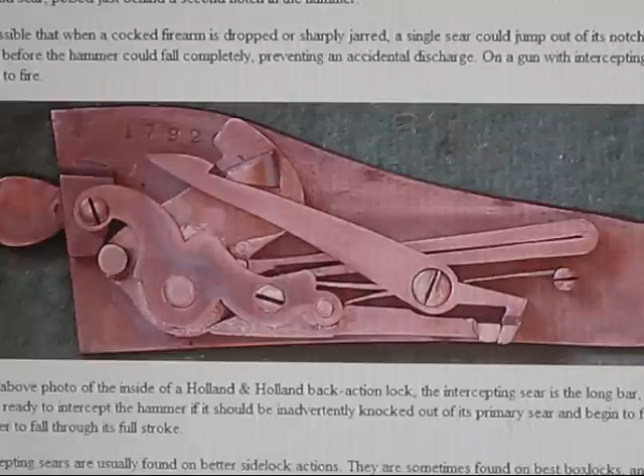So I'm going to start into the locks this week, and what I wanted to show you was the type of safeties I'm going to incorporate into this lock. And basically, this is a picture off of Hallowell & Company's glossaries and definitions page, and this is a picture of a side lock with an intercepting sear. This is the regular sear down here where it engages the tumbler, and then up here this is an intercepting sear that intercepts, hence the name, the part of the hammer on an internal hammer like this.

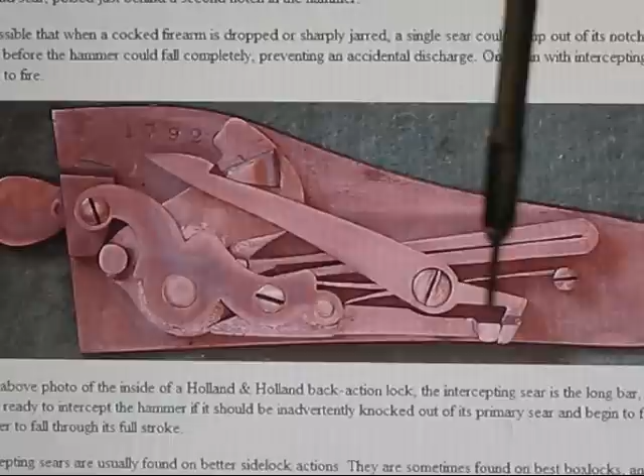What I'm going to do is take this basic design and modify the L&R locks to use this intercepting sear idea. And then there's another feature I'm going to put on the L&R lock, and you can see this has a nice dolphin shape to it, this lock here. But it has something else that's a real nice safety feature.

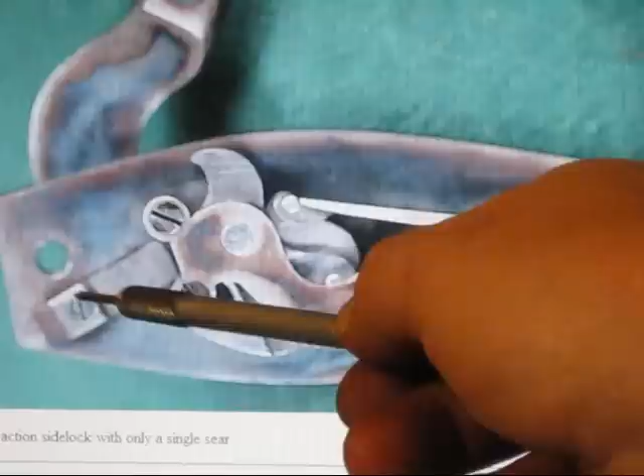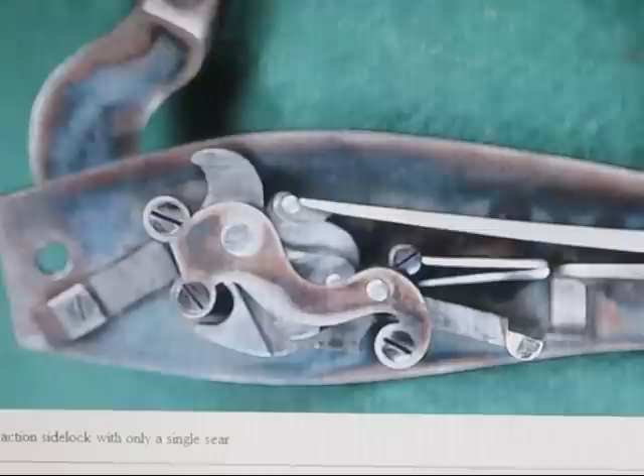This piece on the inside here, as you see it, is called a stalking safety. On the outside it's got a little flat or knob that allows you to push it in or out, and it actually engages the hammer itself on the outside. There'll be a notch in the bottom side of the hammer in between the plate and the hammer itself, and this safety will physically engage the hammer and keep it from rotating. So this is a back action lock similar to what I'm going to use, but it doesn't have the intercepting sear. It has a single sear.

So what I'm going to do is incorporate a stalking safety into it and the intercepting sear to intercept the tumbler. I'm going to show you how that's done, and I'll do a little drawing to show you how it looks on paper with the type of modifications I'm going to make, and then I'll get started on building them.

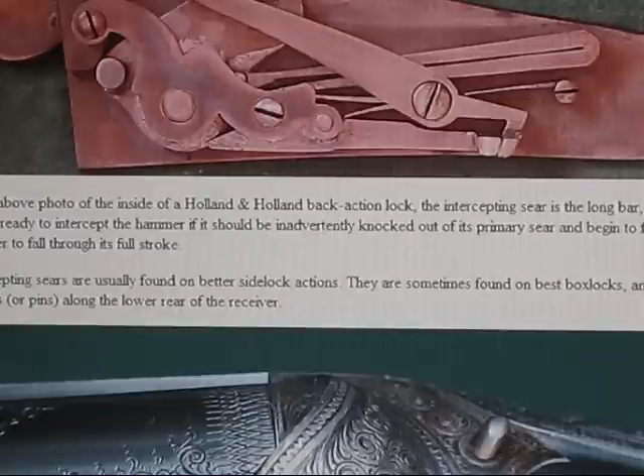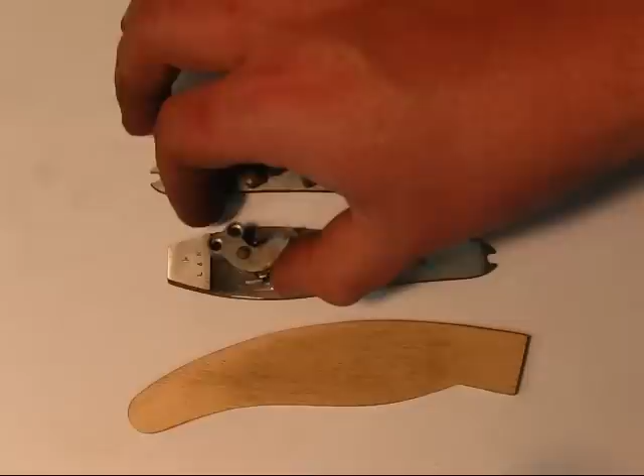So what I've got here is the left-hand lock, which is still mostly fully assembled. And then I've got the right-hand lock, which is almost completely taken apart. All that's left on here is the tumbler and the bridle right at the minute. And then I've got the lock template that I'm going to use to reshape these. I want to show you the template first, how I'm going to change the body style of these straight locks to a nice dolphin shape.

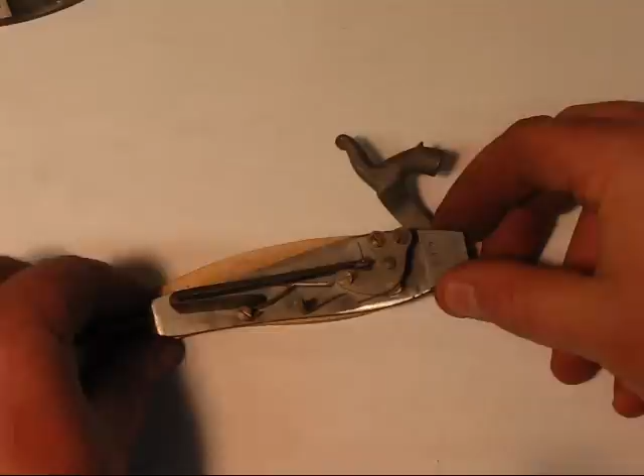The way that's going to work is, I've used this template for a lot of other guns, and it's got a long tab up here on front which allows me to shape it any way I want to tie into the action, and it's a little longer in the body section here, which allows it to flow better into the pistol grip section. And then the rest of it just fits so that it will cover all the internals of a standard L&R lock.

So basically I get to use all the internals of a regular L&R lock, and I'm just going to replace the lock plate on the outside to give it that nice dolphin shape and get the right contour to match the grip and tie into the action. So now I'm going to talk to you about how I'm going to modify the safeties to give it an intercepting sear and a stocking safety.

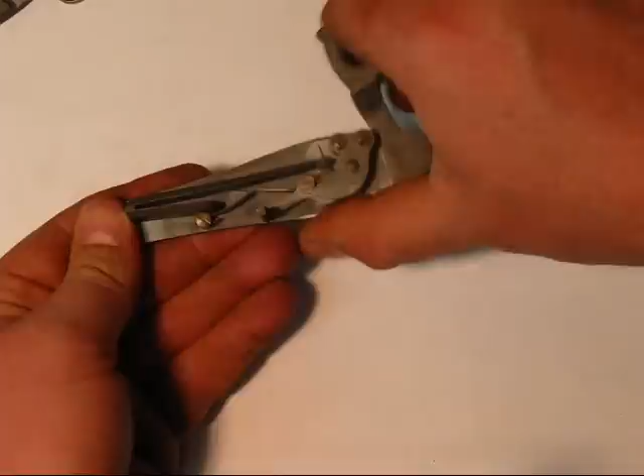On a standard L&R lock, they only have one safety built into them, and that's a half-cock notch right there. You can't pull the sear through that notch unless you're really trying. It is possible to break through a half-cock notch on just about any style lock that has a half-cock, but for the most part you can't really push the sear through it. And then it goes to a full-cock position. So that's the only safety on a standard L&R lock, and on most muzzle loaders. The traditional safety is a half-cock notch, and that's all you get.

But since this is a cartridge gun and it's a double rifle, and this one happens to be extremely big and going to have considerable recoil, I want to build some other safety features into it, like the intercepting sear I talked about and the stocking safety. To do the intercepting sear, I'm going to machine a hole that runs right along where the tumbler sticks through the bridle here.

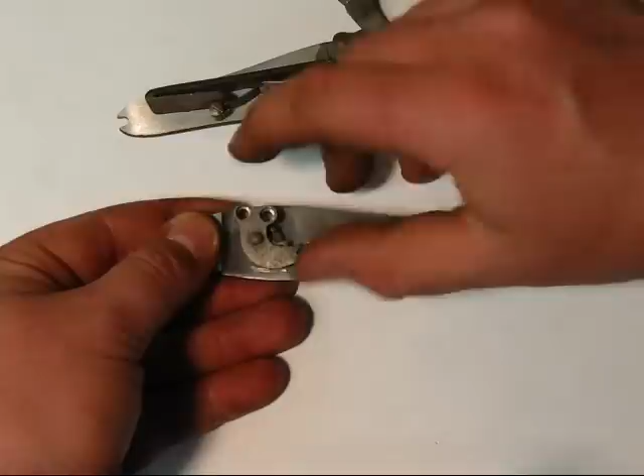And then there'll be an intercepting sear that runs up here and catches the front edge of that bar sticking out. So that in the event of recoil dislodging the first sear, that bar will engage and catch the tumbler itself and prevent it from rolling down with recoil. The only way to make it actually clear and fire would be to have it on full cock and to be able to actually work both sears up at the same time.

There'll be a leg that comes off the tumbler and penetrates right through the bridle, and there'll be an intercepting sear that intercepts that leg and prevents it from rotating forward.

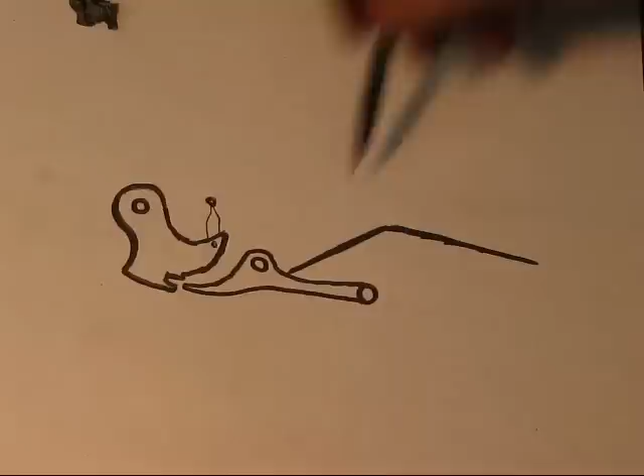So here's an exaggerated drawing of the tumbler and the sear spring. The main spring would be hooked up to this stirrup here. And so basically, same piece right here. Got the tumbler shaft, half cock, full cock, and the stirrup. And that's what I've got drawn here, half cock, full cock, and the stirrup.

So what I'm going to do to make an intercepting sear out of this is I'm going to add a piece of material up here to the top of the tumbler. And if you were looking at this from the top down, what you would see is a piece like this that had the axle sticking out of it, and then it'd come back to this, and you'd have your stirrup piece sticking through here and up.

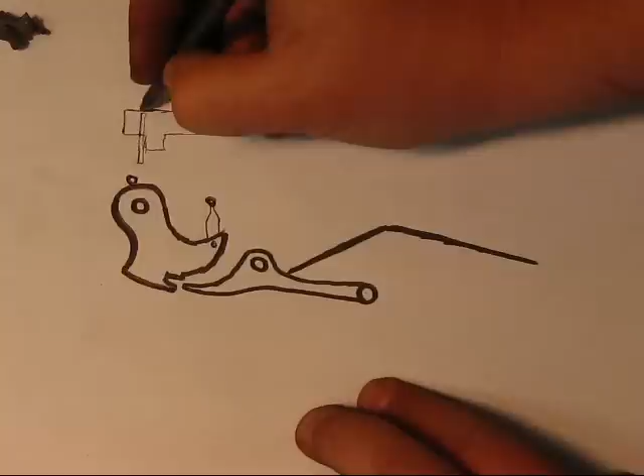Like so. And so what I'm going to do is I'm going to add a piece to this that sticks out through the bridle like so. And that'll give me a piece sticking out the top of it here, so that when I add the... and of course this isn't drawn exactly dimensionally how this is going to be, it's just to give you an idea of the second armature of the intercepting sear.

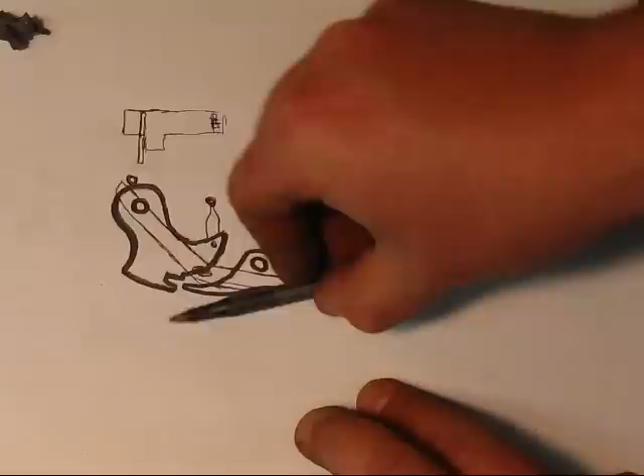And so there'll be an intercepting sear piece that'll lay basically on the outside of the sear, and it'll be hinged in here somewhere. And so what'll happen is when the sear releases, the intercepting sear will drop down out of the way and allow this to rotate. But if only the sear releases and not the intercepting sear, it'll catch and prevent the tumbler from rotating.

So basically, if your trigger piece were down here, and you pull the trigger, it moves both pieces, clearance happens, the sear disengages from the full cock notch, allowing the tumbler to rotate. But if recoil, or bouncing it or jostling it or dropping it, knocks the sear loose from the full cock notch, the intercepting sear is still engaged and prevents the tumbler from rotating. So that's going to be the intercepting sear.

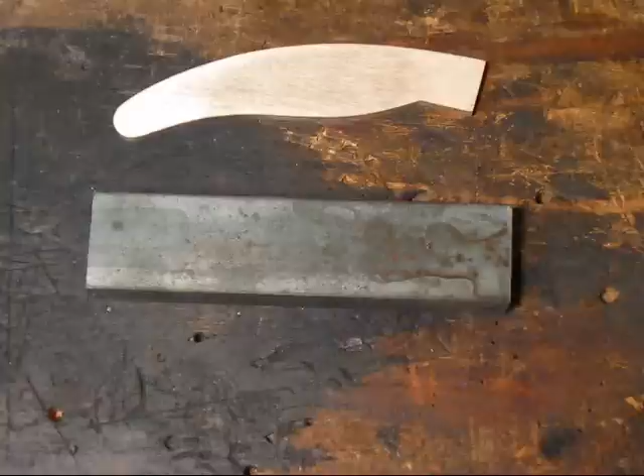Since I'm going to be making several of these locks, two for the double rifle, and then I've got a pistol build that's going to need a lock this shape as well, what I've done is I've cut three pieces of just plain old 1018, and the reason I'm not using 8620 or anything on this is 1018 will still color case beautifully to match the rest of the action.

But this lock plate isn't critical. It's not a critical part that's going to take a lot of stress or anything else. It just contains the parts that function to make the lock work. So it doesn't have to be out of 8620 or anything special. It can be out of just plain old 1018, and it'll color case up and match really well, so that's not going to be a problem.

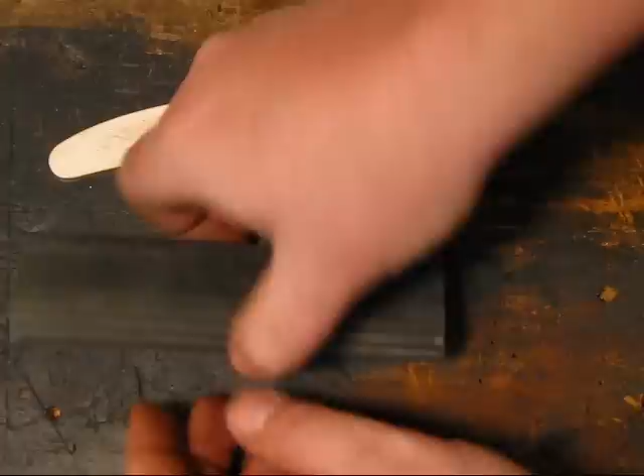So what I've done is, since I've got to make three of these, and they all need to look the same and match, is I cut three pieces of plate, and then I took my TIG and just washed over it and tied the ends together.

I didn't even use any filler rod to do this. I just washed them in and tied them together at both ends, and that keeps everything held together nicely in alignment. And then what I'll do is I will put my template on here, I will scribe around it, and then I'll probably come in and punch it so that I don't lose my scribe lines while I'm removing material. And then I'll come in and I'll just cut it out basically.

And then as long as I don't cut clean through the face and the back, if I leave the radius and the face here till the very last thing when I'm ready to separate them, I can go ahead and do some of my drilling operations while it's still all stacked together, so I know that everything will be the same from each lock. So that's how we're going to start this, scribing some lines on here and then cutting it out, and then I'll start drilling my holes where they belong.

So the first step was to hack off the bulk of this extra metal up here, and then I used my 12-inch disc grinder to shape the curved contour, and it works pretty good that way if you can get it down close to the line and then just use a big grinder to take it off. If not, it can always be done with files or hand grinders or any number of other ways. I just happen to have a big 12-inch grinder that removes metal pretty fast. But the stack's still welded together at both ends, so that's holding it nicely in shape.

Now what I'll do is I'll come in and I'll saw these parts off as close as I can get them without getting too accurate, and then I'll use an oscillating sander to take in the internal curve and probably do a little of the external curve with it, the concave and the convex part, and then up here I'll probably finish this out with file work.

You'll notice when I laid this out, I used a piece of metal that was fairly close to the overall size that I was going to need, so I didn't have a ton of stuff to remove. And you'll also notice that I made the parts that are going to be the most difficult to work basically as shallow as I could make them. That way it'll save me time in removing material.

I'll leave this section back here until last, along with this section up here. So basically the ends will be done last after I do some drill work and stuff. But I'll be able to take off all of this section here, doing some saw work, and then using the oscillating spindle sander, and then there's a little bit of hand work to clean up the last of it. So pretty straightforward. I'll show you what it looks like once I get some of this other stuff removed.

So now I have everything pretty closely shaped, and all that's left is just the ends that are still holding the stack together, and it follows the template pretty closely. Just what I wanted. So the next step is to do some layout work, and what you'll notice here is I can basically use the lock to get everything fairly close. The original lock plate will give me all of my holes, and I can use edge finders to actually locate edges and then move to center on each one of these.

So that's the easy way to do it: use the lock plate, do some layouts, then take some measurements to ensure that you find actual true center, and then clamp it in the mill drill and drill some holes through it. On this one particularly, all of these are threaded holes, but this one here for the tumbler, I'll actually drill it undersized, and then I have a reamer that's the right diameter, and I'll ream that hole through as a final cut. So that's how that'll be done, and I'll show you how it looks after the holes are put in it.

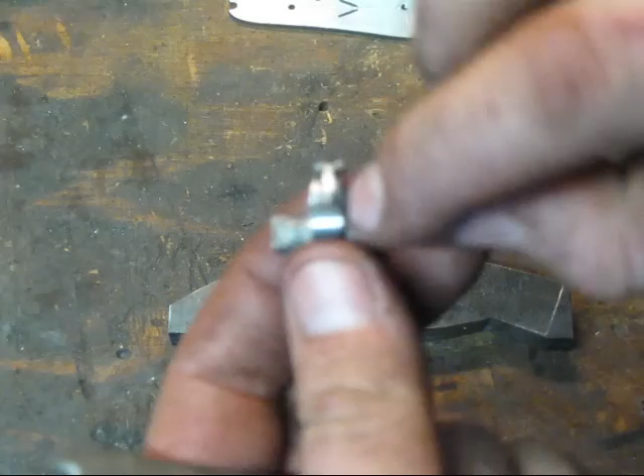So I drilled all the holes here, reamed the tumbler shaft hole, and wanted to show you this. In a standard L&R lock, the way they come, I don't know if you'll be able to see this really well or not, but I'll try and get it in here. What you'll notice is that this surface here is nice and shiny and ground, and there's a couple other surfaces that are ground and polished, but overall most of these parts on an L&R lock are as cast, basically.

So none of the shoulders are polished, none of the shafts are polished, the tumbler shaft isn't polished, and you'll notice that when I stick it in here, it's really kind of a low tolerance fit. It's got a little slop and play in it, and it doesn't really snug in and rotate really smoothly. It's hard to get this thing to focus on that without going to a macro setting. But anyways, you get the idea that there's a bit of slop in these from L&R's manufacturing.

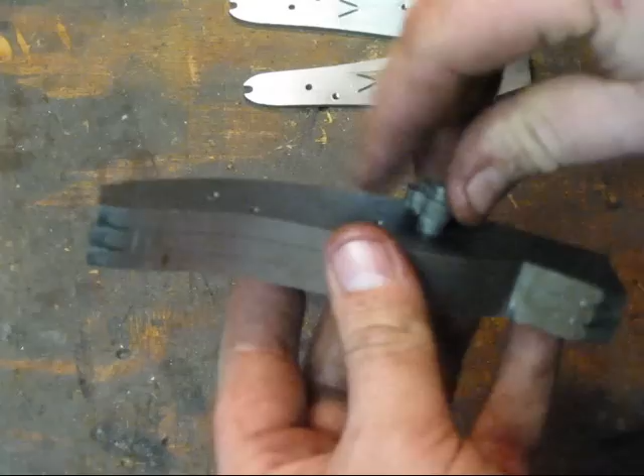And so when I reamed this, I reamed it just a few thousandths undersized. You'll notice that this one won't quite seat down in there like it does on that other lock. What I'm going to do is take some lapping compound, smear some on this, and hand lap this until it's a precision fit in there, where it has just enough slack in it to rotate really smoothly. That way it's got the full amount of shoulder on it, full amount of bearing surface, the most precision fit I can make it.

And when I harden this lock plate up and color case it, it ought to rotate like greased glass in there. But right now it's a little tight, a little snug, and I will hand lap that in to make it a real precision fit. These other holes are tapped, except for this one, which is the mainspring hole, and this mainspring hole is drilled for a precision fit too. So, anyways, just wanted to show you that so you can see the difference between a lock that works and functions good and a lock that's truly a precision fit, a hand-fitted, craftsman-made lock.

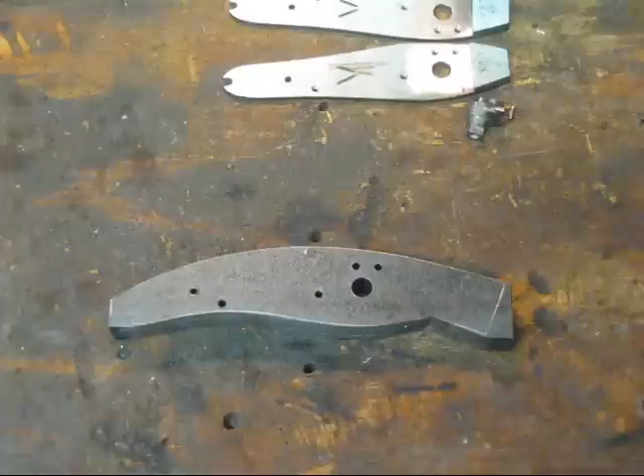So, I guess I'll go on a little rant here for just a second. Some of the lock companies are really, really good about the fits of the parts in their locks. Chambers' flintlocks are some of the finest I've ever seen made. Their fits and tolerances are very good. They work like greased glass. They're a very fast lock. R.E. Davis is another good one. Their locks are pretty well made. And L&R is probably the third major company in this country, and a lot of their tolerances on L&R stuff were a little loose, actually.

And so, just from my point of view, if I can buy a Chambers in the same style and period and time frame as I would an L&R, I'll take the Chambers every time, because it saves me a lot of work when I'm actually building the stuff and making the lock. In this case, though, nobody makes this style of lock plate in this type of lock with the safety features I'm going to put in it, so it didn't really matter. I had to make it anyways.

Buying L&R parts just saves me the time of having to machine and manufacture each individual part, plus make the springs. I'm able to strip their parts out, polish them up, clean them up real good, bring them into real tight tolerances, and turn their parts into a real good high-end lock. So for me, it's just a time saver to gut one of their locks and redo it. But anytime I can buy a lock that's really high quality and precision made, like Chambers or Davis, I'll take the Chambers every time.

So none of these holes are tapped yet, and the reason I didn't tap them yet is because there's no point in trying to run a tap down through this big thick block and running a risk of it getting jammed in between the layers or anything and breaking a tap off.

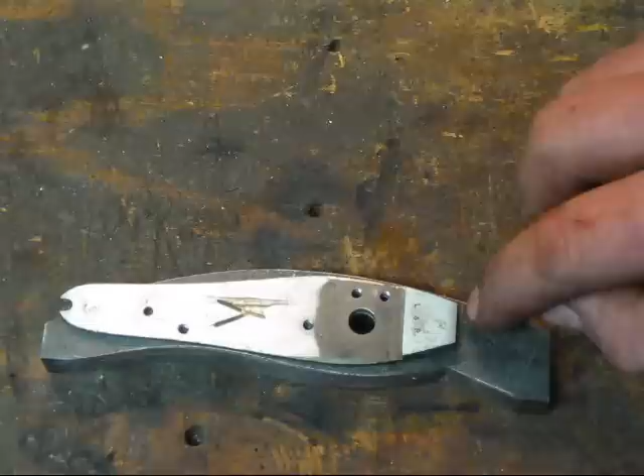And then the next step, what I'm going to do next on this is go ahead and separate these. I'm going to finish rounding out this end, which will take that weld off of there. And then I'm going to lay it out for length where I want my piece to end up here in front. I need a little more length than what I have here because of the way it's going to fit into the corner of the action, and so I'll leave a little extra on here and I'll go ahead and cut it off, and that'll take care of the welds I made on this end, and I'll have 3 separate locks that I'll be able to lay down flat and start machining them down to proper thickness.

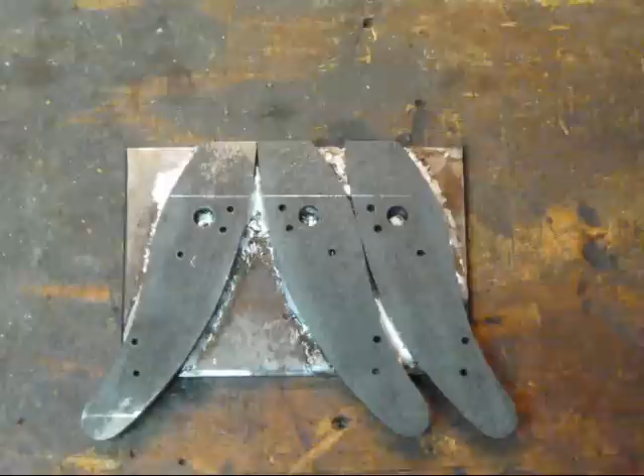So as you can see, ready to start machining these down to thickness, and what I've done is I've laid these out. It's 2 lefts and a right, so I'm going to machine the inside material out. And what I did was, because as this gets cut and it gets thinner, it's going to tend to warp. So to prevent it from doing that, I did a really quick and ugly solder job and soldered it down to a pretty thick piece of plate steel here. And that'll hold it down nice and tight, so that when it's cutting back and forth and it starts to get thinner, it doesn't warp up away from there and cause an uneven cut, hopefully.

You can see I just laid a scribe line on there. That's roughly where I'm going to cut to. When I get close, I'll measure it on the mill and actually bring it down to where it needs to be, but that's close enough. And then there's a scribe line back here, and this is one of the changes I'm going to make, and I do this on a lot of these kind of locks, is I leave this back thick just like the front is.

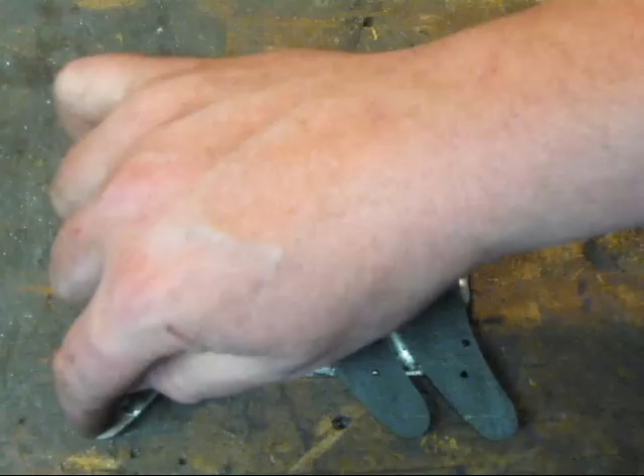And the reason I do that is instead of putting a wood screw in, which is what this lock's designed for, what I'll actually do is drill through and through from the left lock to the right lock, or vice versa, and I'll tap one side and countersink the other, and then there'll be one screw that pulls in and sandwiches the tail of both locks into the wood. So that extra bit of material there gives me room to countersink, and it gives me room to get some extra threads in there. So that's why I leave that end piece on there.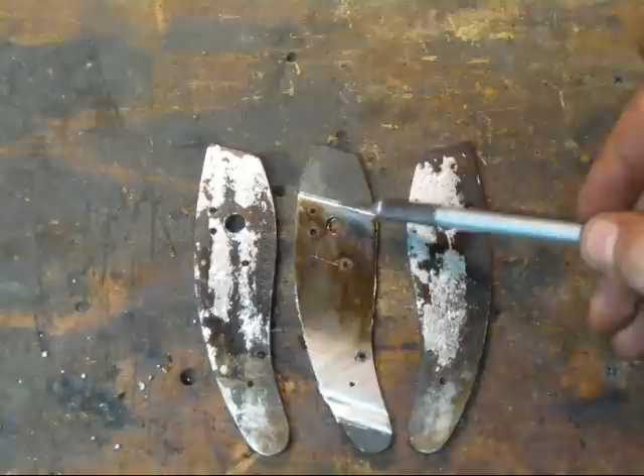So you can see that I got them machined down. All three of them have the same inset in them, and they're the right thickness now to work with the parts that I've got. And you can see that I've unsoldered them from the plate that I had them attached to for the machining. Now what I'm going to do is clean up all this solder on the inside and outside and all these edges. I'll clean up any machining edges that are left rough. I'll clean out all the holes, and then I'll go ahead and tap these holes.

I'll lap the tumbler hole and get the tumblers fitting real good, and then I'm going to reassemble everything on these locks and make sure that everything functions as a normal lock before I start making modifications for safety and whatnot.

The reason I'm going to do it that way is because if anything's off or anything's wrong, depending on how bad it is, I may be able to just fix it, or if anything is badly off, then I'll just scrap these and make a new set of plates and redo everything. But it'll save me time instead of going through all the effort of making the safeties and getting it all built and then putting it together and it doesn't fit. So I'll go ahead and clean these up after they cool and reassemble them, and then I'll see if everything works properly. If it all does, then I'll move on to the next step of making the safeties for them.

So here's the first of the three locks put back together. This is the one I'm going to use for that extra project, and you can see it really enhanced the shape of the lock plate, gave it a nice smooth curve, and so it'll match a nice pistol grip radius that way and really blend in better in the stock and have an overall better appearance.

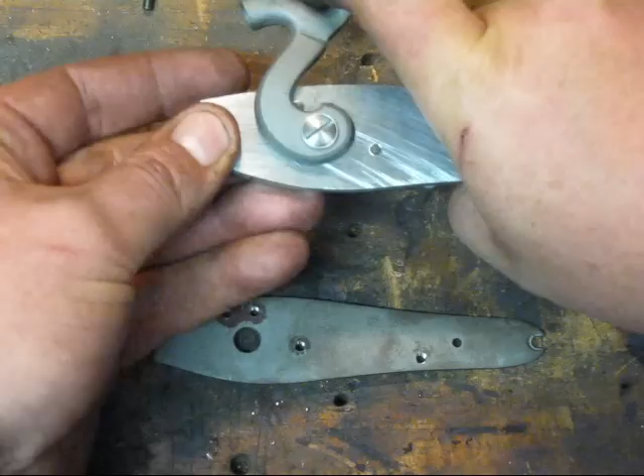This one is basically done. I won't have to add the safeties or anything to this because this is not going on a double rifle project. It's actually going on a pistol, and so it'll be a real simple setup that's basically finished the way it is. I just need to polish out the rest of these parts and polish out the hammer, and it's basically done. But it functions just like it should, from half cock to full cock and then to release. So that's the way that one's going to look.

One of the reasons I put this one together before I messed with the other two is because I wanted to look at clearances and stuff, and I was kind of concerned about this when I was first setting it up and thinking about where I'm going to put the stocking safety. And as I mentioned earlier, I had wanted to put the stocking safety in front of it here, but you'll notice that in the full hammer down position, in the fired position, there's not very much room up here. And so on the double rifle, where the breeches will stick out past it, I don't think a guy's going to be able to get his hand in there and work it really smooth and cleanly. It'll be kind of a cramped space.

So what I'm going to do is, on the other two locks, I'm going to put the stocking safety behind the hammer, and then it'll have plenty of room back here. A guy will be able to get his hand in and snap it forward or back and make it work properly. So a little change of plan, but nothing that really changes anything overall. It just means that the stocking safety will be to the rear instead of to the front. So that's how these work. Other than polishing, this one is done.

I'll get on to the other two and get them put back together, make sure everything's going to function as well, but they should. All the holes should be in the same alignment as this one, so everything should function on the other two. Once I know that they're going to function just fine and everything's going to work properly, then I'll start in on putting the stocking safety in and the intercepting sear.

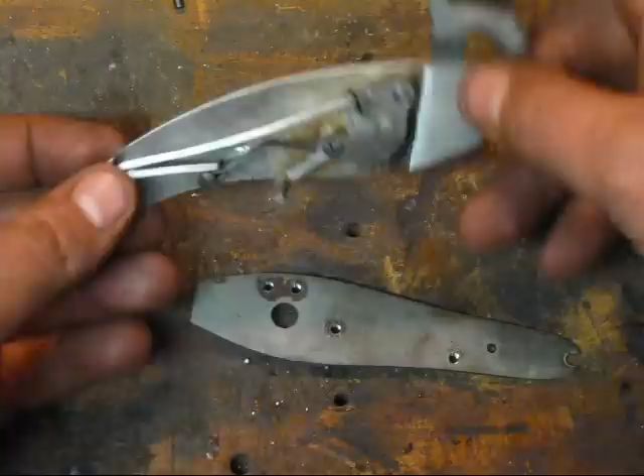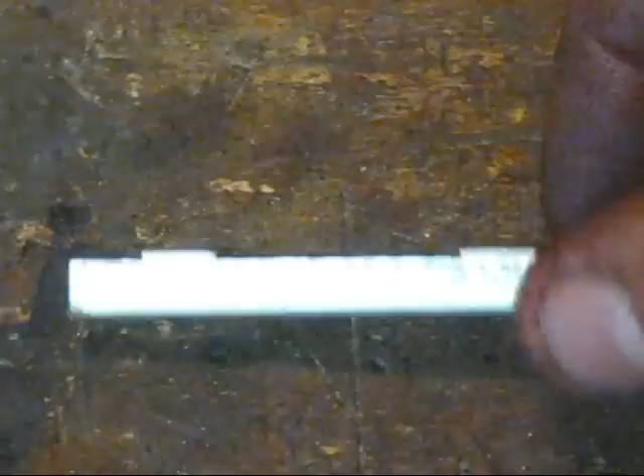So here's the first step in making the stocking safeties, and obviously you can tell by the size of my fingers I've got my camera zoomed in quite a bit. What I did was I took a piece of 1/4" key stock, and I machined these two little protrusions. I just removed metal all the way around them, and you can see they stick up about 30 thousandths. That is going to set into a groove that I'm going to machine in the lock plate. And that'll be like a key and a keyway basically when I'm done, so that it has something to slide back and forth in the lock plate. And then I drilled it and tapped it for screws.

And there'll be a channel on the inside of the lock machined in. These screws are considerably long right at the minute. These are going to have to be trimmed down to the exact length so that they bottom out and leave slack, but I'll machine a groove in the inside of the lock that these will recess down into, and basically it'll create a little sandwich between the shoulder of the screw and the shoulder of the safety, and give it a groove to slide in, and it'll slide back and forth in a kind of a trapped position that way. And this also, working from this direction, machining this off and drilling and tapping these first.

The other thing that this does is, to do the rest of the machining to shape the outside of the lock, I will take a piece of scrap metal, I'll drill a couple holes in it and suck this down into a piece of metal. Then I'll be able to put the whole thing back in my mill and do the rest of my machining.

So doing it this way in these steps allows me to be able to put a piece on here and clamp onto it real solid to do the rest of my machine work. So that's the first step in making the safeties.

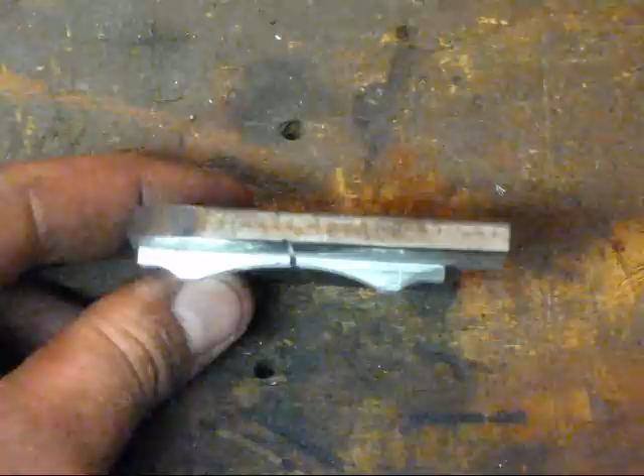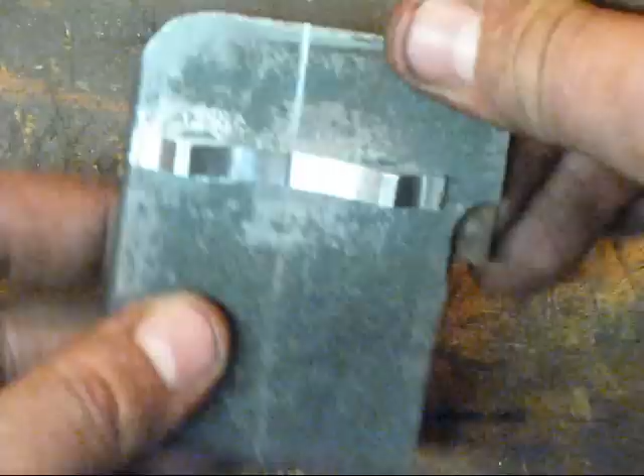So here's the two safeties made out of the one piece. What I did was I machined the center radius, and then I came in and machined both ends down to their thickness and made a nice little radius, and then I just cut it in half with a hacksaw. And what I'll do is take the two screws out, clean up the ends where my hacksaw cut's not very straight, and the safeties will basically be made.

The only thing I'll have to do to these is polish them up a little bit, and then of course I'll have to either checker or engrave or scribe some kind of gripped texture on this section here on each one, so that the guy can get a good feel for it and make the safety work good just by feel. But other than that, pretty easy way to make those. Make it as one piece, then cut it in two, and be done with it.

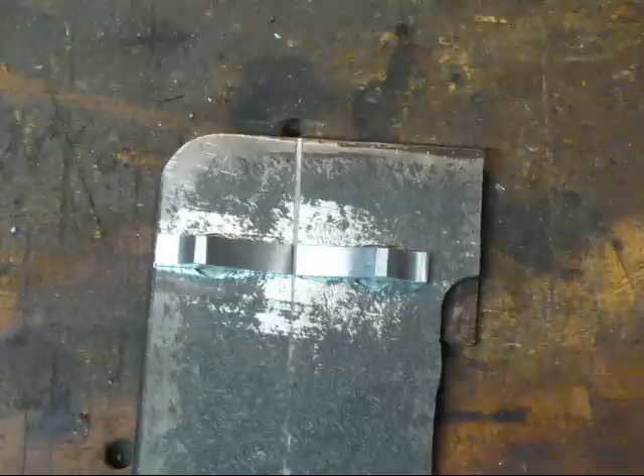So the next part is to strip the locks back down. Since I assembled them and made sure they were functional, the next part's to strip them down and do some layout and machine the grooves in the lock plate that'll accept the stalking safeties.

So I've got this one lock stalking safety done and installed on it. I've got this one all fitted and ready to go. I just wanted to leave it apart long enough to show you how it worked. It goes to half cock, then it goes to full cock, and then when it's in full cock, the stalking safety will slide forward, and it stays there with a little detent system.

It also stays in the off safe position by a detent, and I wanted to show you all those little parts and show you how it looked before I moved on here. So what I've got is the hammer, and this would be the outside piece on the stalking safety, and I don't know if you can see it, there's a couple little detent holes in there.

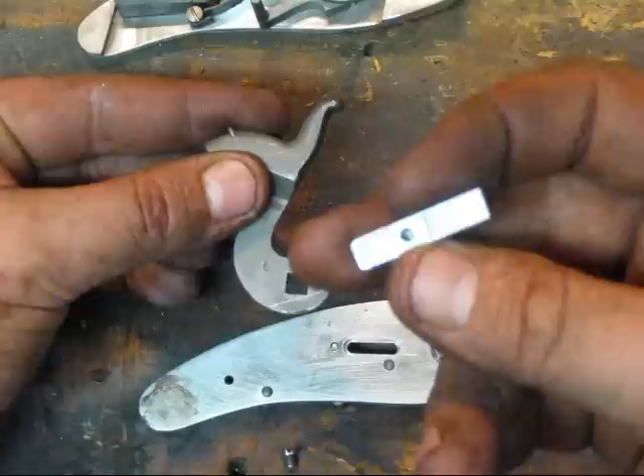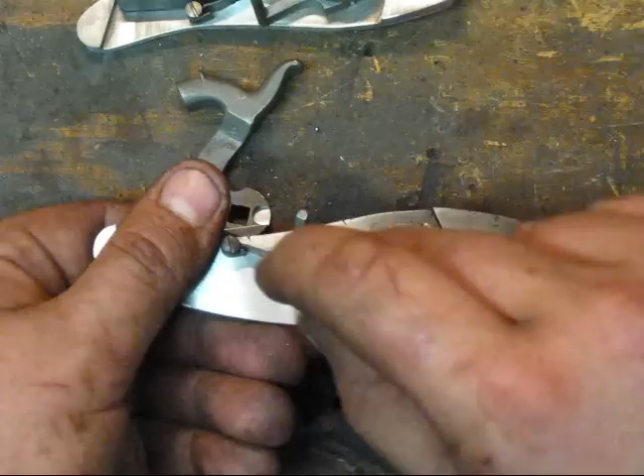The way it works is it just slides forward and engages the notch that I machined in the back of the hammer, and so it gives it a real positive engagement, makes it so that there's a mechanical lock so that the hammer can't drop unless the stalking safety's off. And the way it's fitted into the lock is it's recessed on this side to match the recess on the stalking safety. And then when you flip it over, it's also recessed on this side so that the screw head is below flush, so it doesn't catch any of the springs or any of the moving parts inside.

And the way this works to keep it sliding smoothly is that the screw bottoms out and stops just short of being able to actually pinch both sides together. So it bottoms out, stops, and leaves just enough slack in it to give it a real clean movement. So that's how it all goes together and how it functions mechanically. And you can see there's a little hole there with a spring, and when I turned it upside down, my detent rolled out right there.

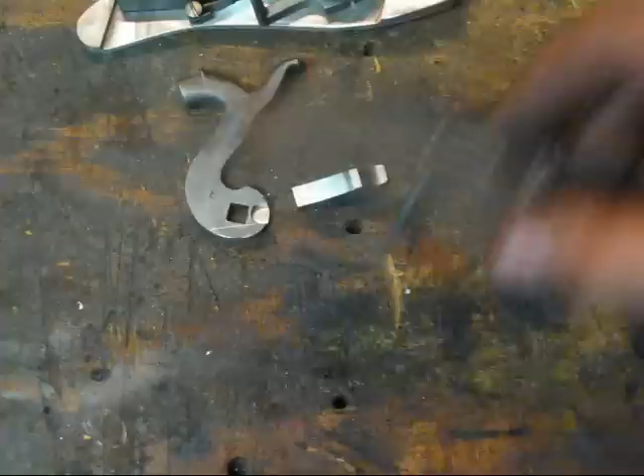So I will put this one together, and then I'll move on to working on the intercepting sears. But that's going to wait for next week. This is the end of my week, and it took a lot longer to build the jigs to get these things all lined up and make these cuts than I thought it was going to, particularly the jig to hold the hammer in position to make that little notch in my mill.

So it took me quite a bit longer to make the tooling, the jigs and setup for my tooling than I expected. So the intercepting sears will have to wait till next week, and I'll start on them Monday and get an intercepting sear built on the inside of the lock up here. So it'll be another piece like I described earlier, and I'll get on that Monday morning.